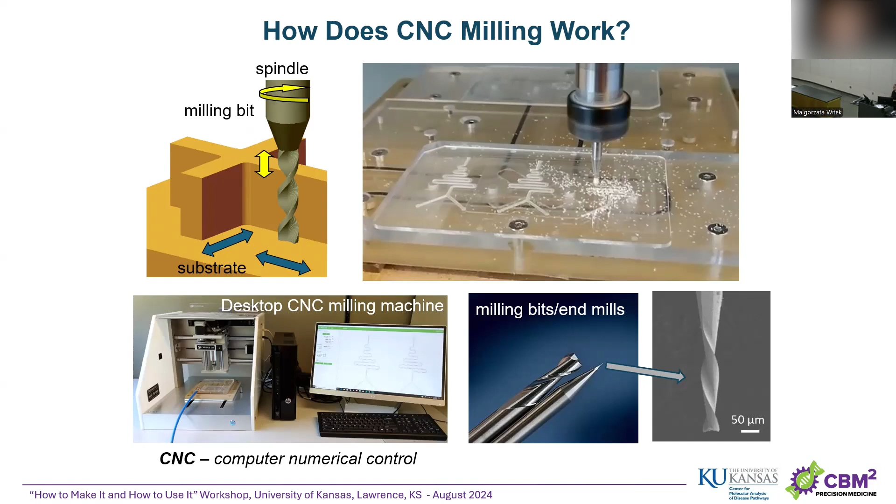To show you quickly how the manufacturing process works, we start with some kind of design in CAD software, computer-aided design. We then transfer it into CAM software, into the machine language that the milling machine can understand, and it's really all user-friendly with a mouse-click approach. Then we can set up our milling machine, load our substrate, and mill, in our case, microfluidic channels.

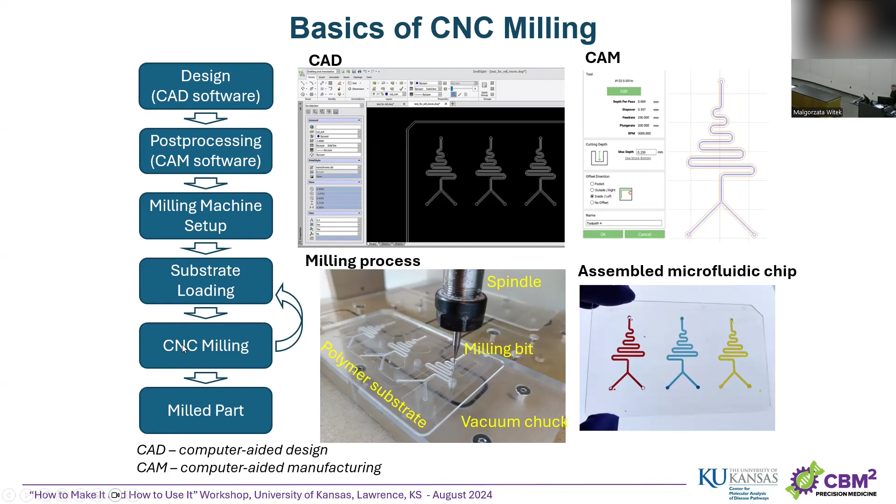If we would like to mill more parts, we don't have to do any of those initial steps. We just load another piece and keep repeating these two steps to make as many parts as we would like. Let's see if I can...

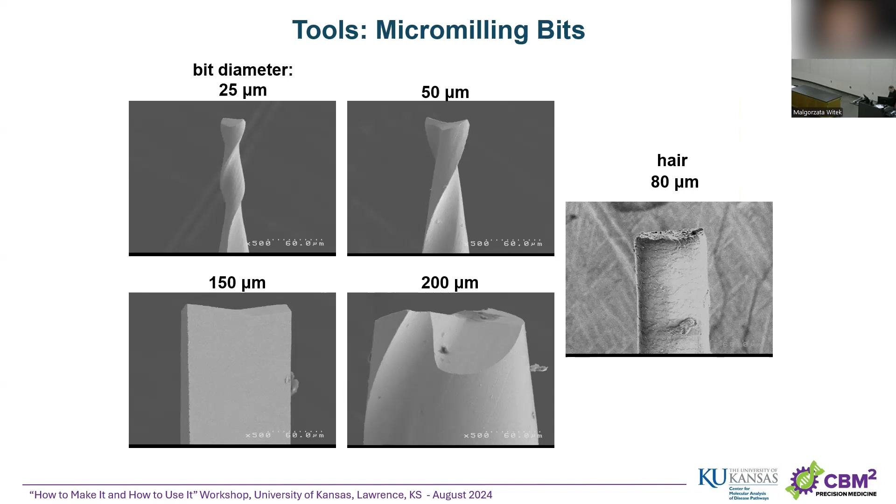Milling bits come in different types and sizes, but the ones we typically use can go down to 25 micrometers. We mostly use something more in the range of 200 to 500 microns. Just to give you perspective, all those pictures are kind of the same ratio as in comparison to human hair, so you can only imagine how tiny the tools are that we're using in the process.

To run those really, really tiny tools, there's in a sense a contradiction: to run really tiny tools, you need really big machines. A tiny desktop machine could never successfully run a 25 micrometer bit because it's not stable enough. You need something really big and dedicated, like this Kern Evo micromilling machine that we have in the KU Physics machine shop. It can spin those tiny bits up to 50,000 RPM with tools down to 25 micrometers.

Multi-axis machining, high aspect ratio structures—and as you can see, the positioning accuracy is plus or minus half a micrometer. This comes from the machine itself, which really gives you on the workpiece, correcting for all the environmental factors, about plus or minus 2 micrometers.

Now, what kind of applications can you have with milling and making microfluidics, making devices? You can have two approaches. One is direct, which is what you just saw in this very loud video, where you're taking your milling bit and cutting channels into the piece of plastic.

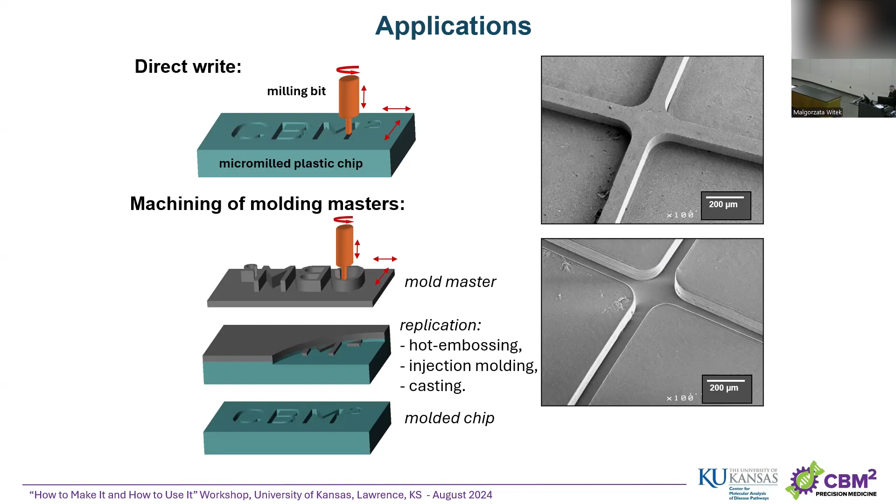The other approach is that you actually cut a relief of the channel that you try to make. So you take a piece of metal, you machine around the structures that you want to become your microchannels, and then using replication techniques such as hot embossing, injection molding, and casting, you can make a relief of your structure in plastic. You'll hear more about hot embossing and injection molding later during the course of this seminar.

A few things to consider when using micromilling. People often ask, how small can you make channels? The answer depends on which method you use. If you're directly writing the channels, the smallest thing you can make is whatever the smallest milling bit you can use. How deep it can go is related to the aspect ratio of the bit. Typically these are 3:1, so if you use a 50 micrometer bit, you cannot make a channel deeper than 150 micrometers, because that's how deep your milling bit would go.

On the other hand, you can make those channels really densely, because the spacing between the channels is only limited by the type of material and its characteristics.

Versus if you go through the relief route, trying to imprint something, it's a little different because you can leave microstructures that are very thin. For example, you can use a 500 micron bit to cut walls that are 25 micrometers wide, and then once you imprint them in your plastic, you get 25 micrometer wide channels. So it really depends on which approach you're taking.

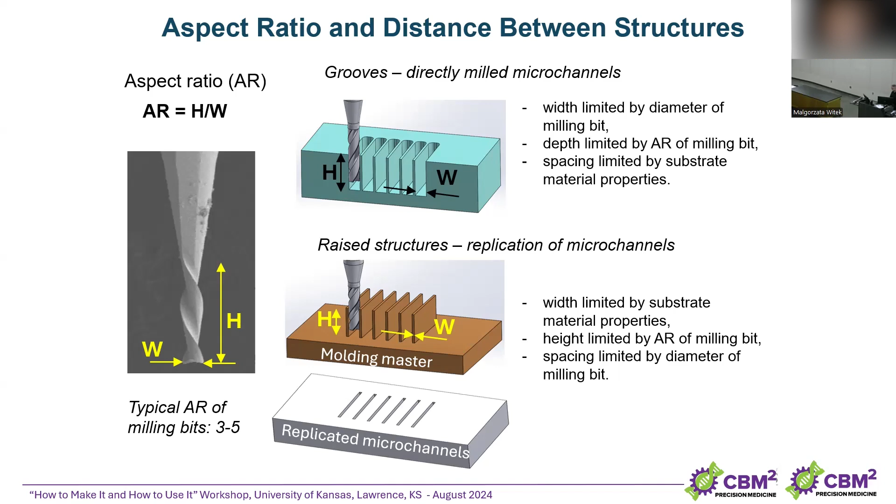We've successfully used both of those approaches in our lab. I'll show you some examples.

Another thing to consider is the shape. You're cutting pieces with a round cutter, so if you're trying to make a relief, any corner you get into will have a radius of the cutter, depending on the size of the cutter in relation to the size of your channels. This may be really visible, so instead of the cross on the left side, you could see a cross with clearly rounded corners. However, if you finish these corners with a much smaller bit, you can have something that looks like a perfect cross.

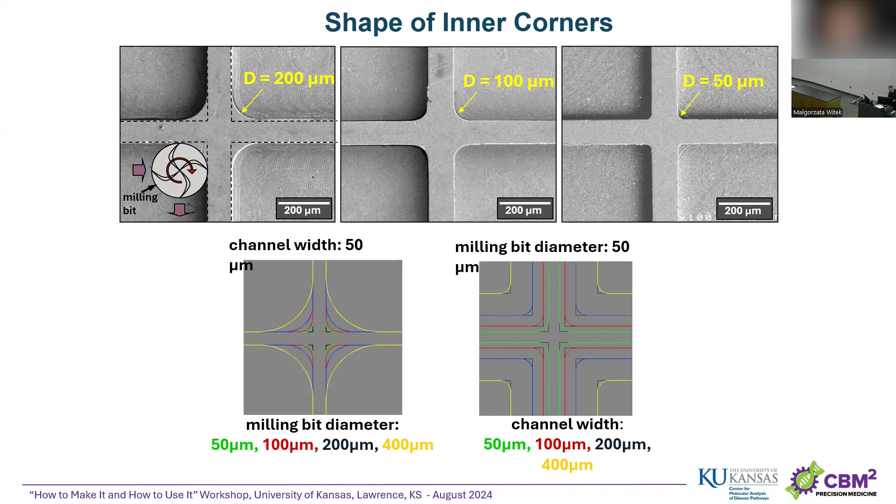Another thing to consider is sidewall roughness. The milling bits, as sharp as they are, cut brass, aluminum, steel, but there are some imperfections that matter in the micro world. You'll never see it on some millimeter-size parts, but you can see it in microchannels. The cutting edge quality of the milling bit will be transferred to the sidewalls of your microchannel, or the sidewall of the relief that, if you're using a replication technique, will then be transferred into the channel itself.

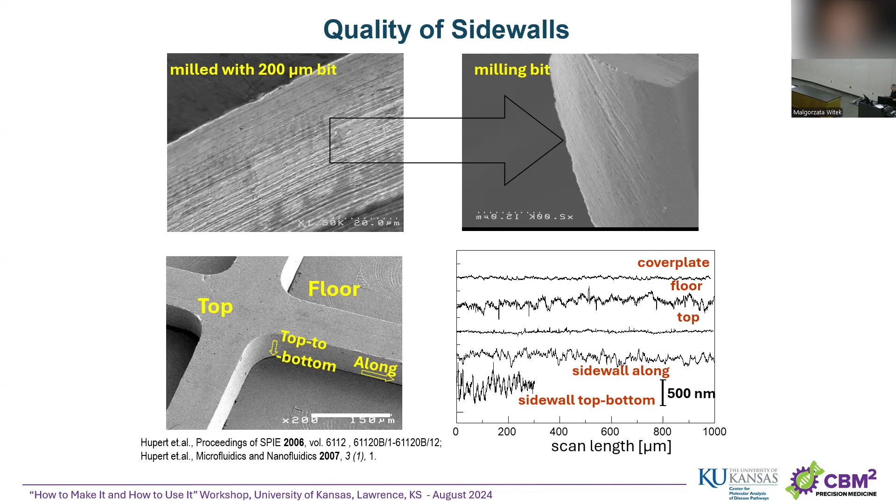This roughness also will be different in different parts—different on the floor, different on the walls—and replication often also reduces the roughness as well.

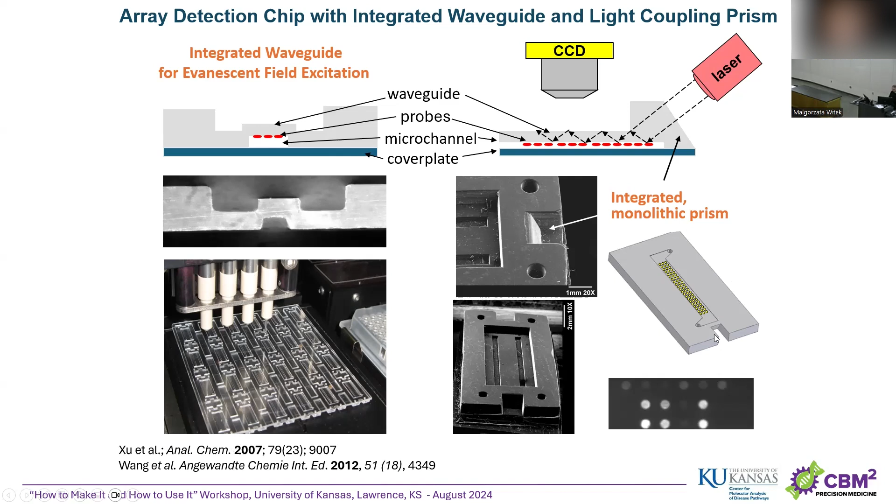of the DNA probes. We can also make different three-dimensional structures, such as interconnects and valves, and use them in integrated microfluidic chips.

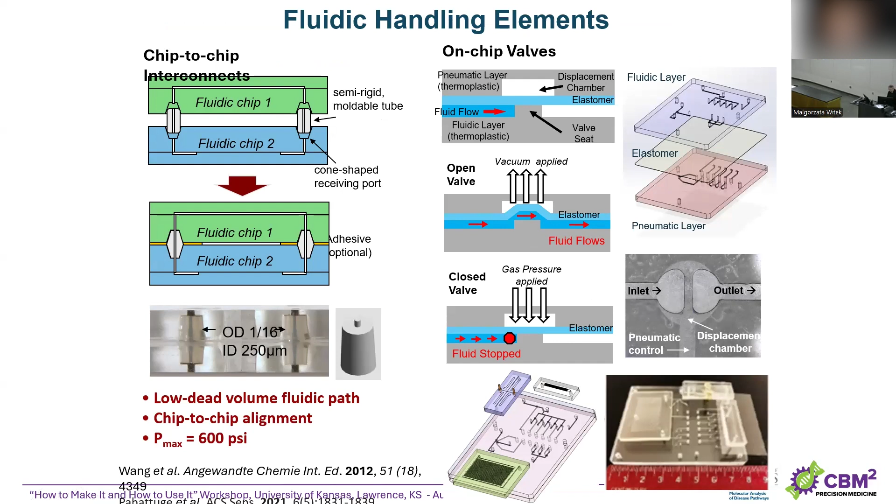I don't know how many of you ever had a chance to work with PDMS. A persistent problem is that you use lithography to pattern photoresist on a silicon wafer, from which you cast PDMS. However, very often, whatever you just patterned on the silicon wafer comes off with your first, second, or third PDMS replication, so your master is ruined. You have to start from the beginning.

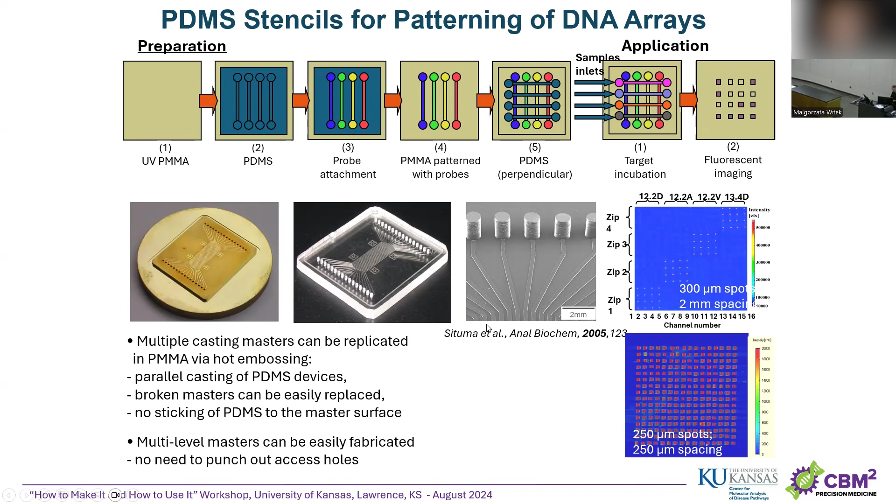Using micromilling, you can make masters that last forever. You can, for example, micromill a brass relief from which you make the copy in PMMA. They can also have all the posts for the access holes. Then you fill it with PDMS, let it solidify, and peel off the design that has channels and access holes in one go. We have also shown the use of this for patterning microarrays.

Just to show how powerful it is for rapid prototyping, this is the example of a microfluidic microtiter plate before we finalized our design to move to really high resolution lithography and producing the nickel mold for high quality replications. We wanted to check whether the entire fluidic structure works, whether this idea even works.

So we would micromill this large area mold insert, hot emboss chips, and you can see that due to the size limitation of what the technique is able to produce, our posts were only 100 micrometers in diameter with large spacing. But we were able to make the plastic replicates, like the one shown on the bottom here, within 5 days from the design submitted to the machine shop, through machining and milling.

The longest time in the whole production process was making those tiny holes that ended up being posts. It actually took 2 days of drilling on this big red Kern milling machine.

Now, the same process, once we saw okay, fluidically it works, does what we want, we could move to design using UV LIGA, where you first pattern photoresist, then electroplate nickel, and use this nickel stamp to reproduce your plastic parts. You can see that we could easily make a 10 micrometer post. But just having the confidence that what we did worked was really a big help, because we had to invest 5 weeks of time from people who really knew what they were doing to get to this point.

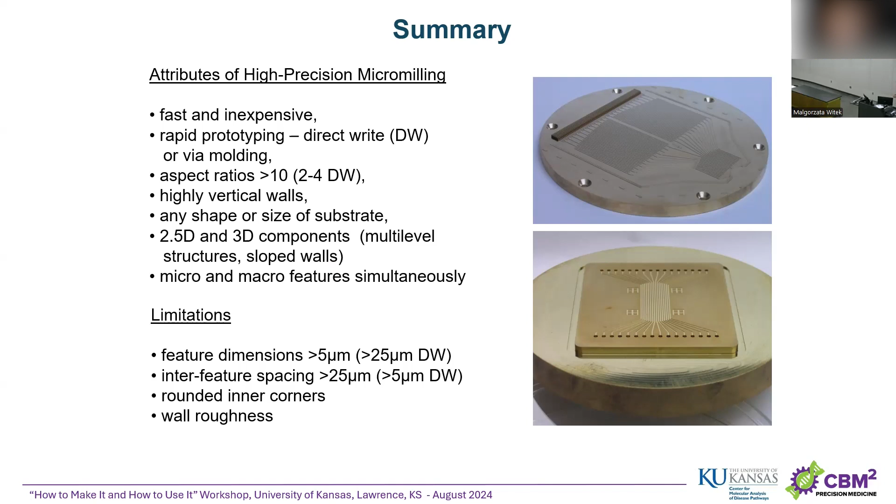There are 2 different ways to produce, either direct write or replication, with high aspect ratios and very vertical walls, as you could see in some of those SEM images. You can also get 2.5D and 3D components by using multiple levels or different tools to produce different features. The limitations are mainly due to the size of the tool or the material properties, some wall roughness, and as compared to lithography techniques, those rounded inner corners.

Let's move on to the second part of the talk, on 3D printing. 3D printing, as I mentioned, is one of the additive manufacturing type of techniques.

I found this definition, and I copied and pasted it because it seemed really nice to me: it's an additive manufacturing process that creates a physical object from a digital design. There's no mention of the material you need to make this physical object, you just take the design and create the object. We know that's not entirely possible, but this definition really shows the general status that 3D printing has achieved over the last couple of years. In many cases, you have a 3D design, take it to the 3D printing machine, you may know nothing about it, you just press the button and get your part.

That's how far 3D printing has come. It's not like milling, where you have to set up tools and stock materials. There are ways to do 3D printing where you literally take a design and get the object. But in reality, yes, we're starting with some kind of feed material that we're shaping into the 3D object.

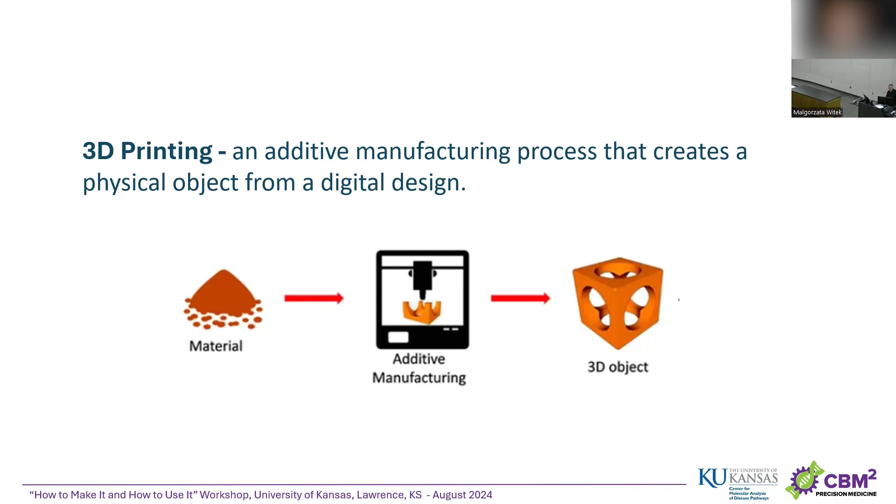And so what can 3D printing do?

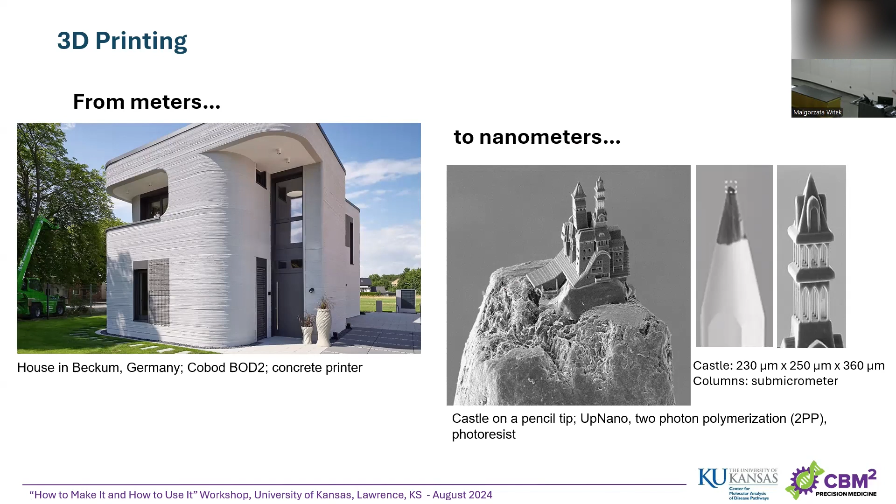You can really 3D print from meters to nanometers. On the left, you can see a 3D printed house in Germany made out of concrete. On the right, you can see a castle on the tip of a pencil, with total castle size of 230 by 250 by 360 micrometers, with columns in sub-micrometer size. So it's a huge range of things it can do.

Really anything and everything in between, from this stainless steel bridge in the Netherlands through a hypercar where the chassis was made by metal 3D printing. The one on the right I actually like as the newest - SpaceX Raptor 3 engine is the third one, most on the right side. You can see how much smaller it got just because some components took advantage of 3D printing, so they could be made lighter, smaller.

You can use it in sports for making midsoles for shoes, for example - no other technique could make a lattice like this easily and commercially viable. You can use it in healthcare. You can use it for hobby applications. And as I said, many, many more.

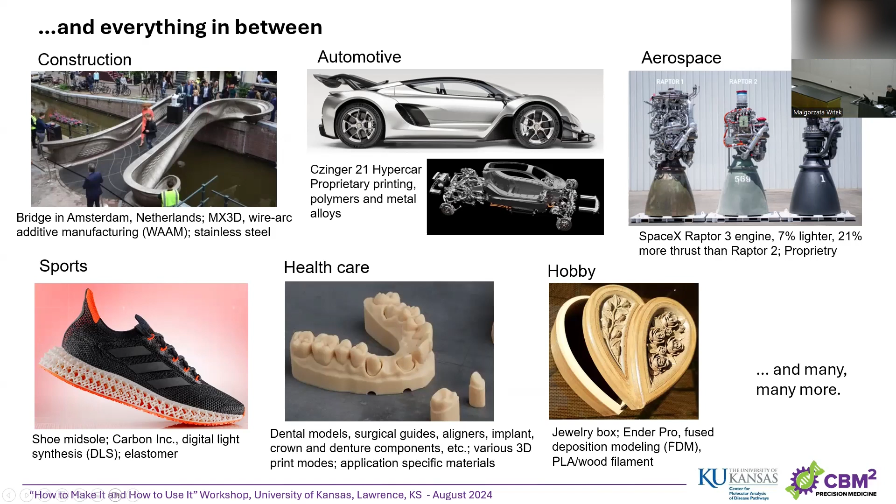So now, how is it possible that we have one technique that makes it all? The reality is that it's really many, many different techniques. Each one has its own name and can take different feedstock material to produce objects.

And this is the list. I don't even know if it's comprehensive, because it seems like many new companies show up on the market, they change one thing in the way they're doing it, and they put a new name. But there are a few different major categories.

Fused deposition modeling - it's extruding really, really thin layers of strings of plastic and joining them together once they're still molten. The other one is stereolithography, and that includes different variants.

Stereolithography works on photosensitive resins, and some types are digital light processing, two-photon polymerization, and digital light synthesis.

Polyjet is photosensitive resins as well, but you can do multicolor printing. It's really just like your inkjet printer in the office - the only thing is that instead of just printing your text on a piece of paper, it keeps making three-dimensional features.

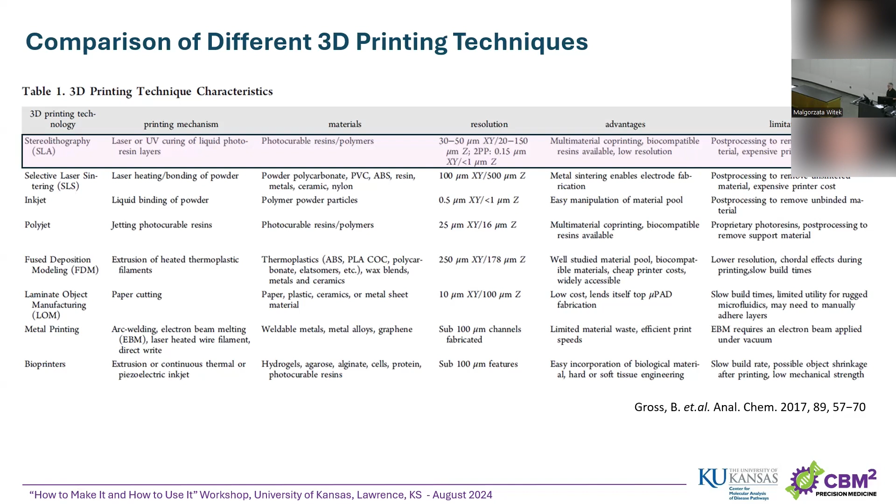I just showed this table from one of the review papers. I'm only going to talk about stereolithography more today, but you can see the different techniques in this presentation, so if you're interested, look through it. There are also a lot of reviews out there comparing them and how useful they are in producing parts you can use in the laboratory.

So you can see similarities with milling. In milling, you had this spinning cutter moving in X, Y, Z, cutting the pieces, versus here you're building your object in X, Y, Z directions.

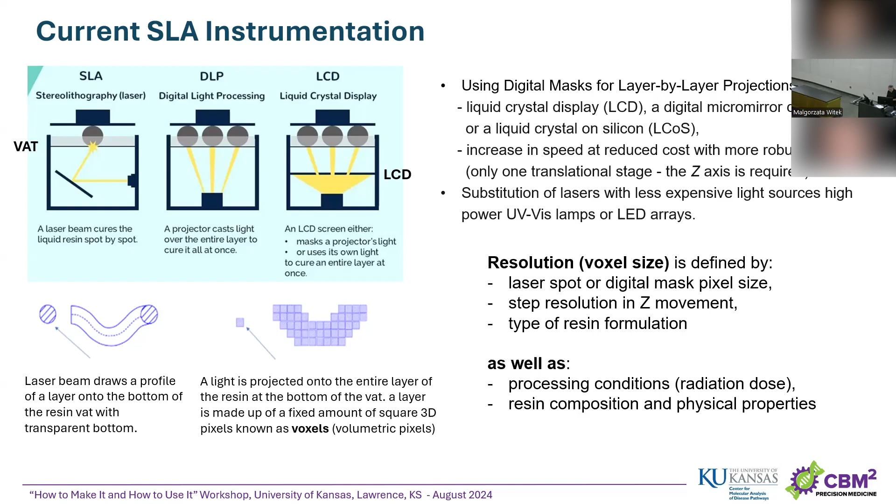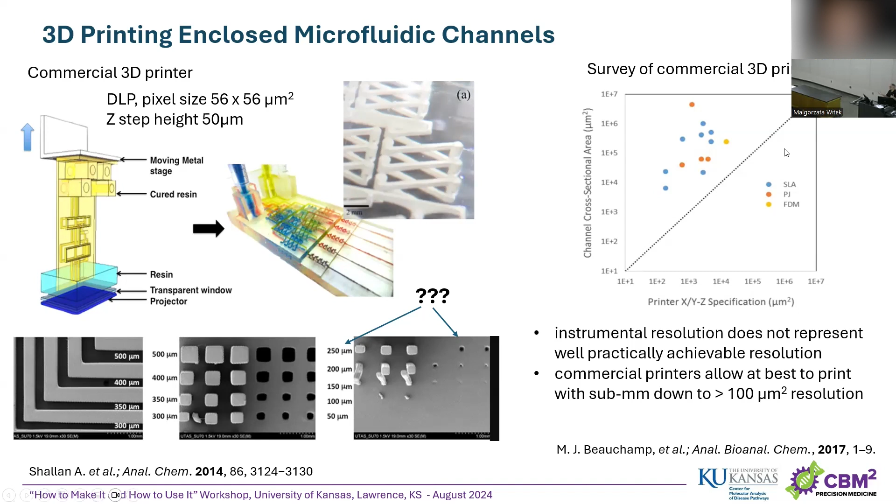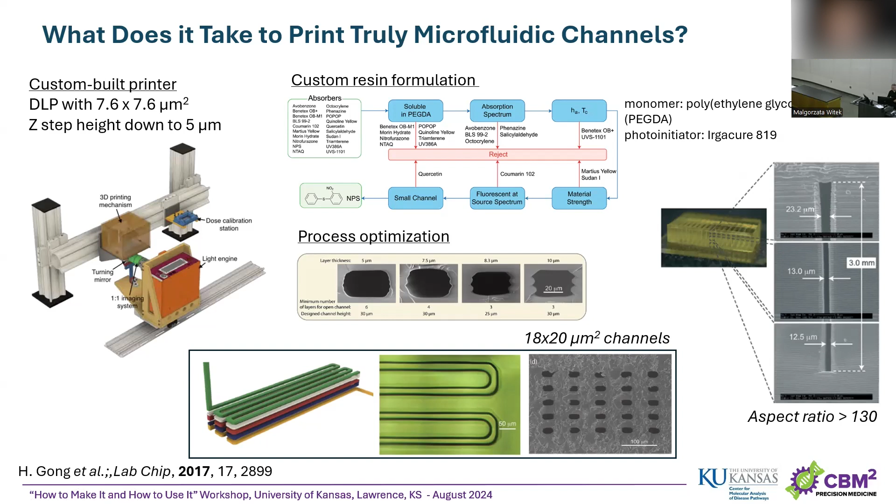As I mentioned earlier, looking at the attributes of 3D printing, yes, it is possible to use this simple definition where you just have an idea, digitize it, print it, and get your part. But if you really want to push the limit, it still takes a lot of research and development. The last type of SLA worth discussing is stereolithography in the nanometer regime.

It uses this so-called 2-photon polymerization, and this comes from the fact that if you're using just 1 photon, like in previous examples, you really polymerize a lot of resin. Anything, even if you focus your laser or UV light, polymerization will occur at a relatively large volume, so you have a larger volume of material being polymerized on one side.

If you use 2-photon based techniques with fast lasers, you make sure that the maximum intensity is achieved only at the focal plane, because it's based on probability that you need at least 2 photons to polymerize your resin. It's probability, basically.

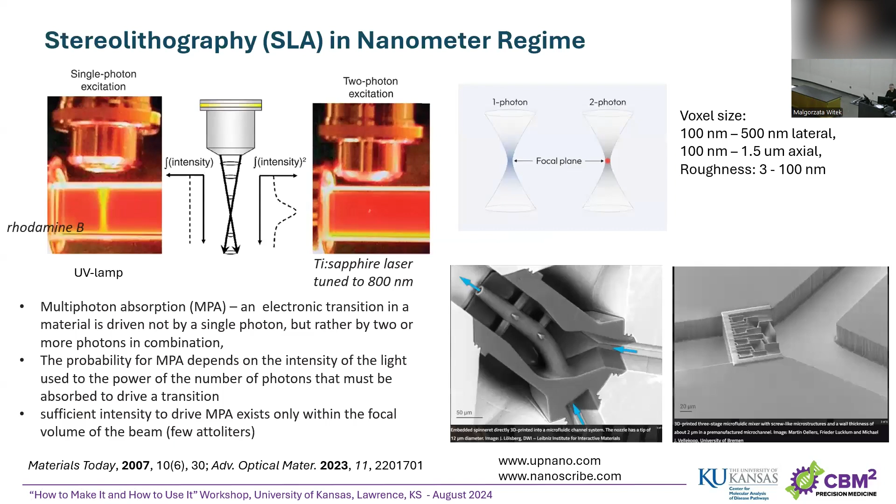Can you comment on 3D printing and high throughput, mass scale production? It does look a little bit... so there are some discrepancies that I see. Can you comment on that? Discrepancies - well, I don't know if you can mass produce using 3D printing. Let's put it this way.

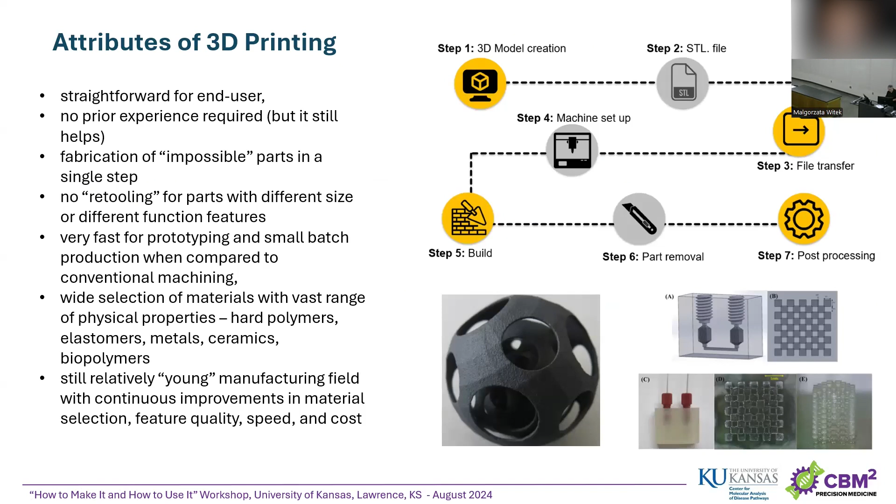If we look at, for example, this ball - this was actually done with multi-jet fusion printing. So the technique works like those powder bed fusions I mentioned: you have a big container with particles, for example this was polymer, a layer of polymer particles.

You bring the laser that melts the plastic to one layer of your part. Then you feed another layer of polymer particles, spread it evenly on top, and the laser comes again and quickly produces those parts. It goes layer by layer by layer.

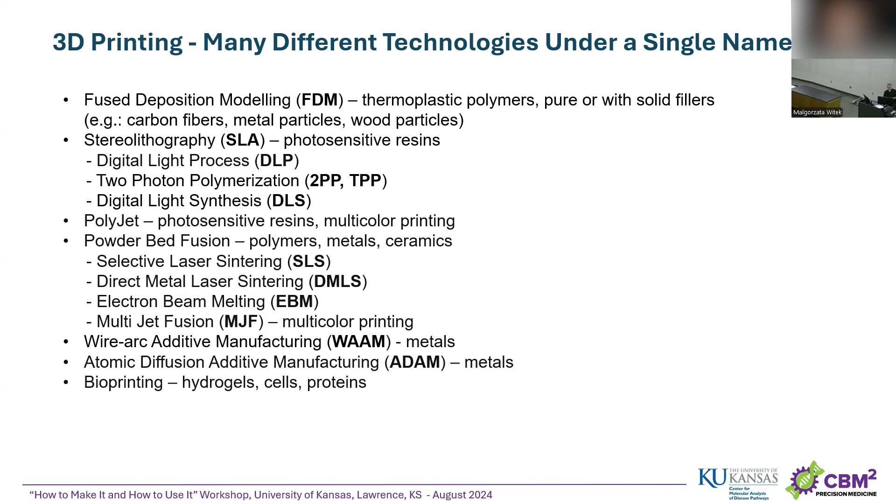Because the only thing - let me put it this way, I can't, because I don't necessarily agree with this, but I don't know, I probably cannot. In those original cartoons you see online, it shows there's another position where you start with material, cut it out, and produce a lot of waste, because everything you cut out becomes waste. When you do 3D printing, you only assemble it, so there's barely any waste.

There are some issues with that I didn't discuss. So the advantage of 3D printing at mass scale, when you have this big bed of particle polymer that you're just sintering to create your 3D object, is that you can reuse everything that wasn't sintered - it can be fed back in, and you keep reusing this. So you're saving a lot of material cost in this sense.

And you don't have any tooling, as Dr. Park will show - injection molding and hot embossing require tooling, so you have to start first with making a tool so you can make your part, and this can run you hundreds of thousands of dollars. But with 3D printing, you just press the button.